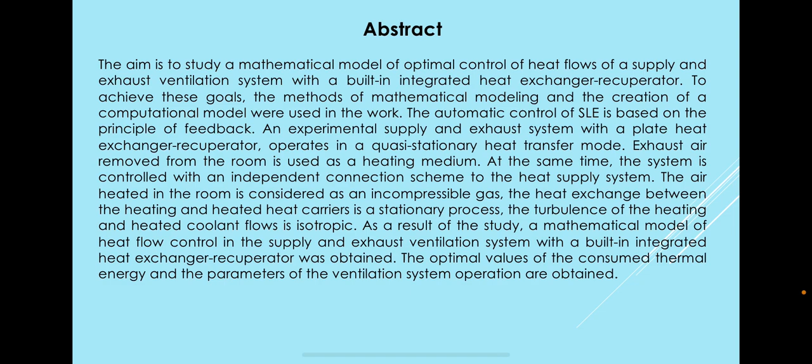Introduction. In modern ventilation and air conditioning systems, one of the main components is an automatic control system, ACS, which performs various functions and also provides highly efficient operation in the range from shutdown functions to centralized regulation and control of climatic parameters, temperature, humidity, control of concentration of hazards, and the air velocity.

The developed mathematical model, which is based on the principle of feedback regulation of process by obtaining information from external sensors, based on mathematical modeling of physical processes occurring in a serviced building or structure, provides prediction of thermal and ventilation parameters of the system in real time with low response time and computing power costs, creating a comfortable and healthy indoor environment.

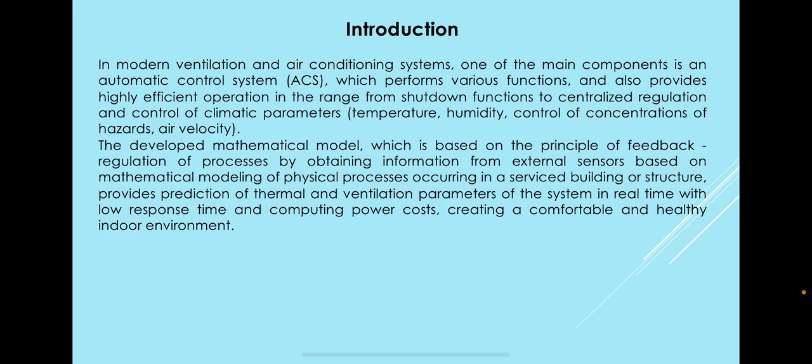Materials and methods. Exhaust air removed from the room is used as a heating medium. At the same time, the system is controlled with an independent connection scheme to the heat supply system. The air in the room is considered as an incompressible gas. The heat exchange between the heating and heated heat carriers is a stationary process. The turbulence of heating and heated coolant flows is isotropic.

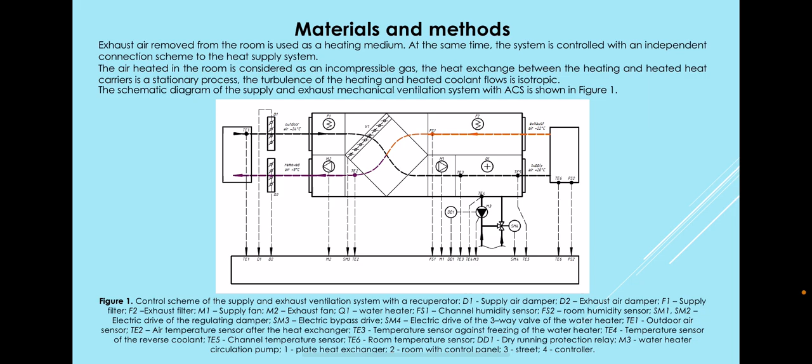The schematic diagram of the supply and exhaust mechanical ventilation system with ACS is shown in picture 1. You can see it on this slide. Materials and methods. The experimental supply and exhaust system under study with a plate heat exchanger-recuperator ventilation system operating in a quasi-stationary heat transfer mode is shown in figure 2. Here is figure 2.

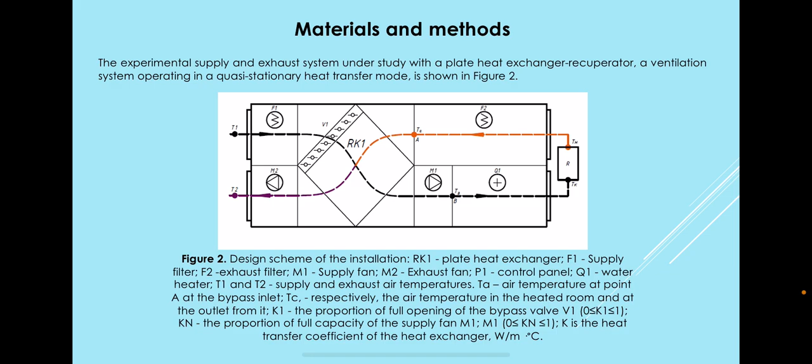Results. The transferred amount of heat is determined by the formula W. When installing the valve V1 and the supply fan M1, figure 1, 2, 3, between the supply and exhaust ducts of the ventilation systems, in accordance with the requirements, the air consumption G1, Gm, and the mixing coefficient at point A of hot and cold air masses U should be taken into account.

It is important to note that the airflow in the quasi-stationary modes has a directly proportional dependence on the heat flows, where the temperatures T1 and T2 are taken in the range of 15 to 65 degrees. At the same time, it can be assumed that the specific heat capacities at constant pressure C1 and Cm are equal to 1.005 kilojoules per kilogram degree Celsius.

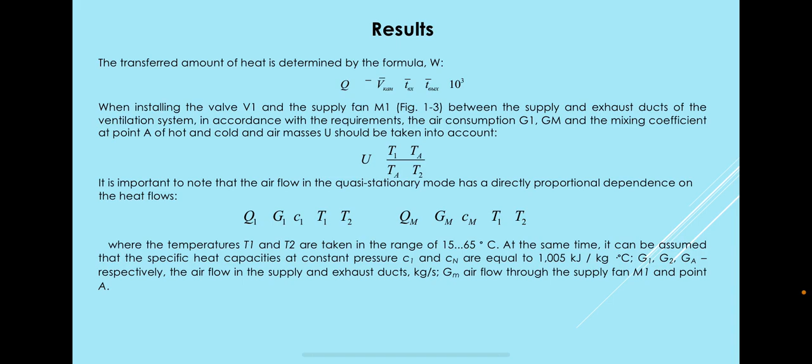G1, G2, and GA are, respectively, the airflow in the supply and exhaust ducts, kilograms per second, Gm the airflow through the supply fan M1 and point A. The specified agreement is made taking into account the mixing coefficient U.

The heated coolant passes through the adjustable flap V1 with a fraction of the opening K1. Then the flow passes using the supply fan M1 with the thermal load R, functioning with the fraction of the full capacity Km. Then the values of the heat flows Q1A, QmA at point A can be determined by the formulas.

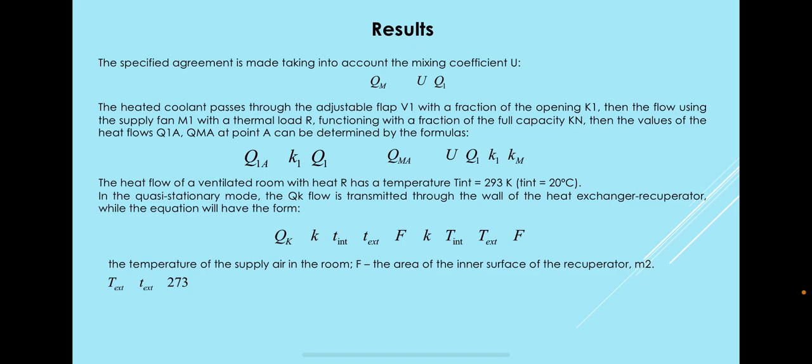The heat flow of a ventilated room with heat R has temperature T int 293 K. In the quasi-stationary mode, the QK flow is transmitted through the wall of the heat exchanger-recuperator, while the equation will have the form: the temperature of the supply air in the room, F, the area of the inner surface of the recuperator, m2, you can see here.

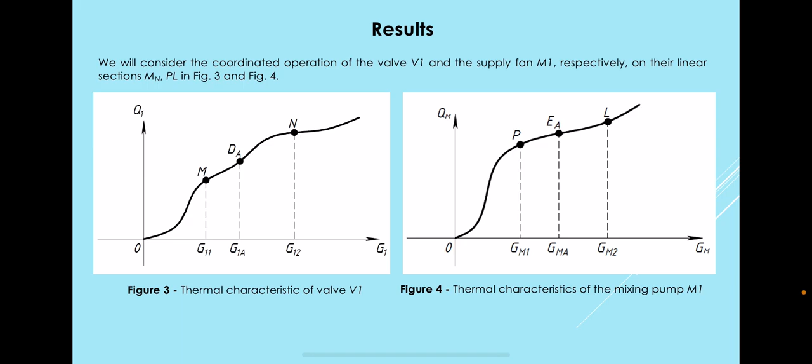Well, we will consider the coordinated operation of the valve V1 and the supply fan M1 in respect of their linear sections MNPL, figure 3 and figure 4. The ventilation process in the normal mode is stationary over time; the values of the main parameters do not change. Based on these factors, the heat balance equation must be taken into account. As a result, we get the balance at point 1. Let's introduce the notation.

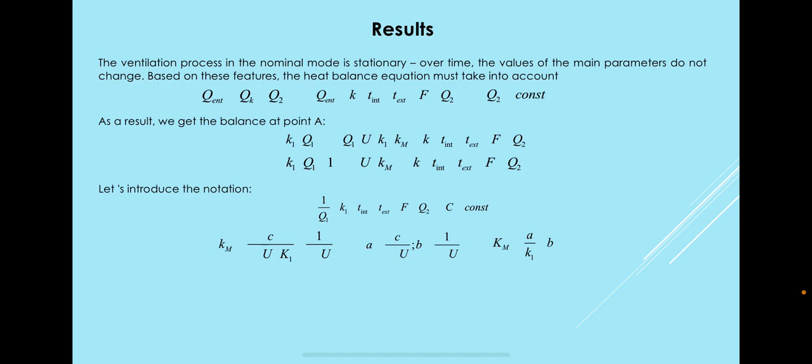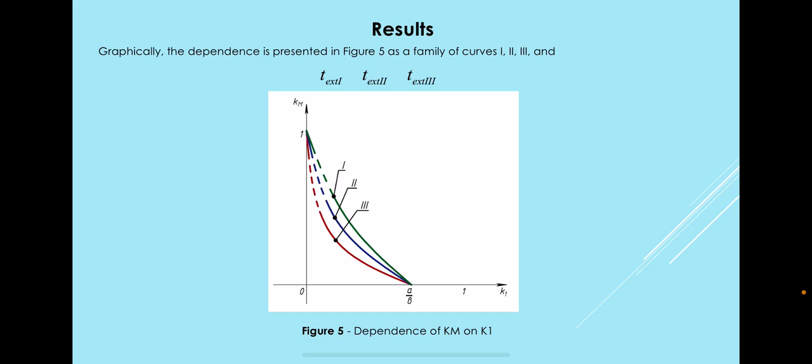Graphically, the dependence is presented in figure 5 as a family of curves 1, 2, and 3, and figure 5 you can see here. The coefficients Km and K1 from the expressions are inversely proportional. You can see it.

Let's analyze the operation of the circuit in figure 2 based on the heat balance equation, and we will assume that the violation of the temperature pressures, if there are no internal sources of heat or cold in a ventilation room with a thermal load R, occurs due to a change of the temperature of the outside air Text by a certain amount delta Text. Such dynamics respectively leads to a change in the temperature T int.

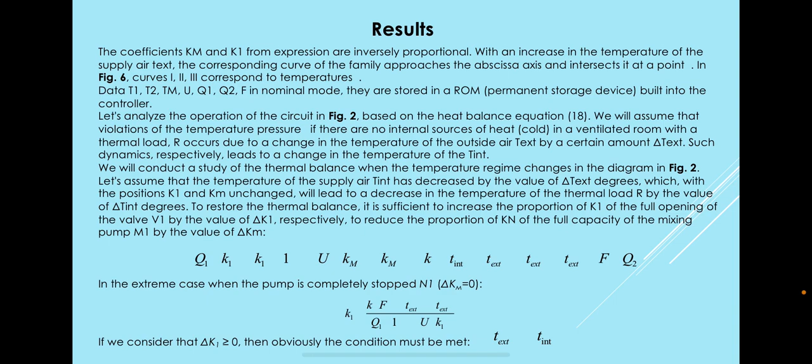Let's assume that the temperature of the supply air Text has increased by delta Text degrees, which with the position of K1 and Km unchanged will lead to an increase in the temperature in the room R by the value of delta T int degrees.

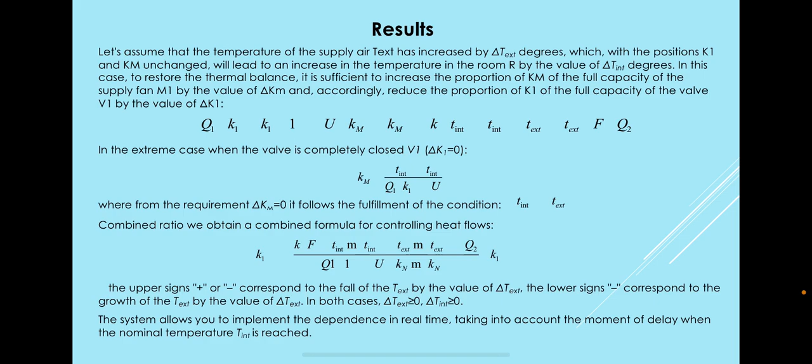In this case, to restore the thermal balance, it is sufficient to increase the proportion Km of the full capacity of the supply fan M1 by the value of delta Km and accordingly reduce the proportion K1 of the full capacity of the valve V1 by the value of delta K1.

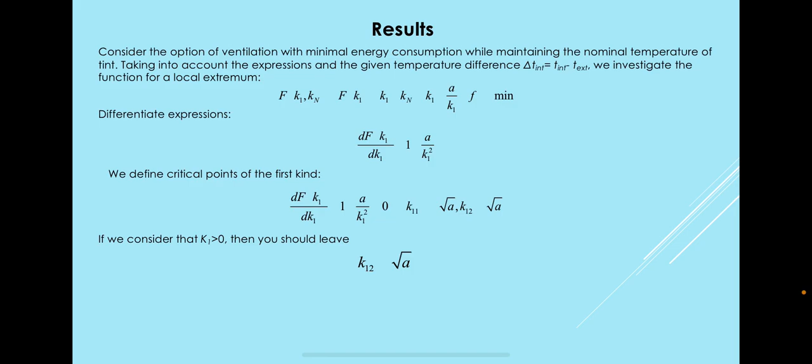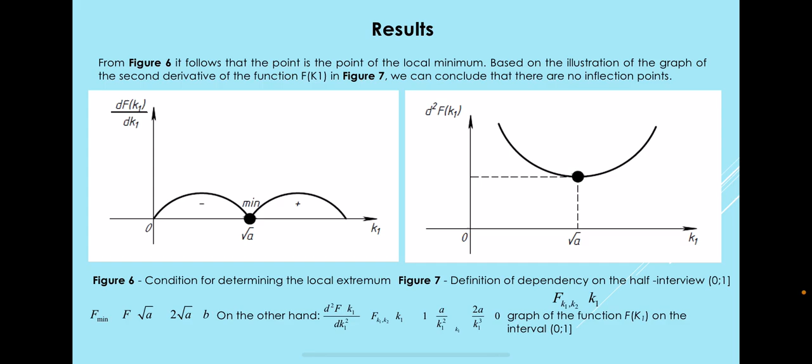Consider the option of ventilation with minimal energy consumption while maintaining the nominal temperature T int, taking into account the expressions and the given temperature difference. We investigate the function for a local extremum. Differentiate the expressions, you can see here, and we define critical points of the first kind. If we consider that K1 is more than 0, then it follows this. Here is the graphic. Consider the condition for determining the local extremum, and figure 7 is the definition of dependency of the half interval.

Conclusions. As a result of the work carried out, a mathematical model of heat flow control in the supply and exhaust ventilation system with a built-in integrated heat exchanger-recuperator is proposed and investigated. The optimal values of the consumed thermal energy and the parameters of the ventilation system operation are obtained.

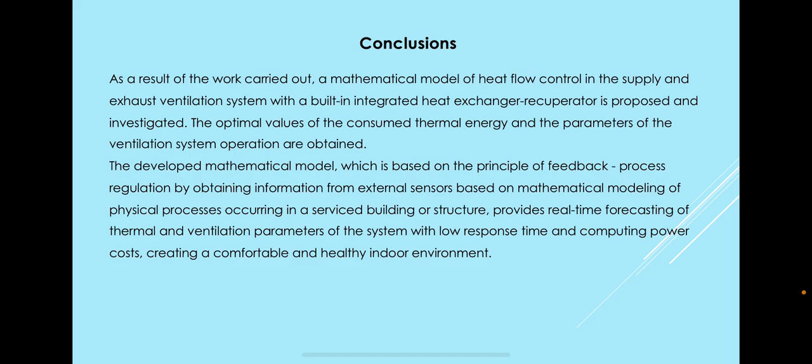The developed mathematical model, which is based on the principle of feedback process regulation by obtaining information from external sensors based on mathematical modeling of physical processes occurring in a serviced building or structure, provides real-time forecasting of thermal and ventilation parameters of the system with a low response time and computing power costs, creating a comfortable and healthy indoor environment.